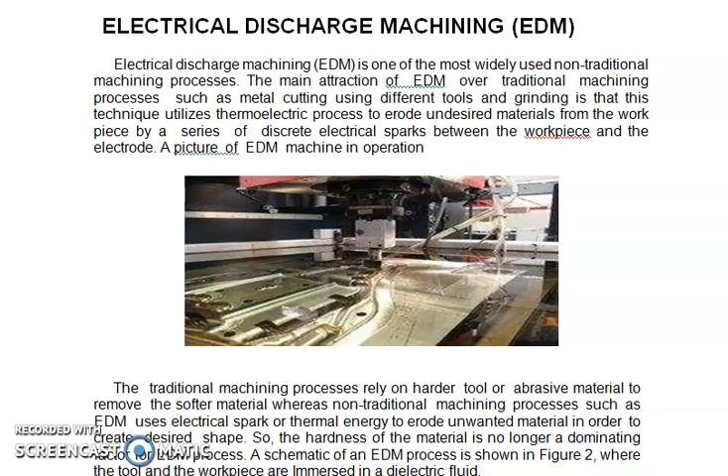The workpiece is connected to the positive terminal and the tool is connected to the negative terminal of DC supply. Hence the workpiece becomes anode and the tool becomes cathode. The workpiece and the electrode are separated by a gap which is called spark gap. This gap is filled by the dielectric which breaks down when the proper voltage is applied. This spark gap is usually maintained from 0.005 mm to 0.05 mm.

When the circuit voltage of 40 volt to 300 volt is applied, then the electrons start flowing from cathode due to the electrostatic field and the gap is ionized. The electric sparks strike on the surface of the workpiece which develop high temperature. It forces the metal to melt and a portion of it may vaporize. The removed portion is driven away by dielectric.

Erosion takes place both at tool as well as workpiece. Less erosion takes place at tool as it is subjected to compressive force. The rate of metal removal depends upon the discharge of current, the duration of pulse and the repetition rate of pulse. In EDM system, the gap is controlled by servo system.

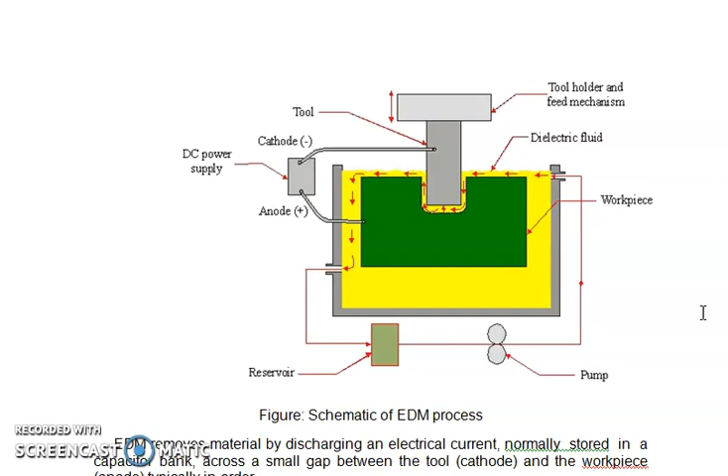Advantages of EDM. The main advantages of EDM are: by this process, material of any hardness can be machined. No burrs are left in the machined surface. One of the main advantages of this process is that thin and fragile or brittle components can be machined without distortion. Complex internal shapes can be machined.

Then limitations or disadvantages are: this process can be employed in electrically conductive materials only. Material removal rate is low and the process overall is slow compared to conventional machining processes. Unwanted erosion and overcutting of material can occur. Rough surface finish at high rates of material removal. Then applications of EDM. It is used for resharpening of cutting tools and machining of cavities for dies.

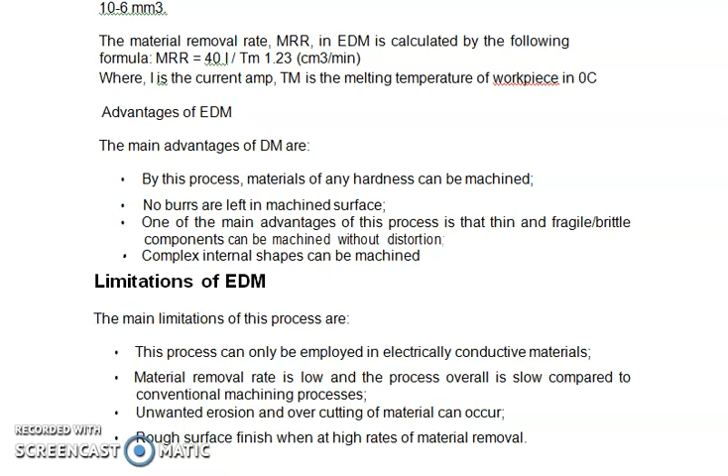The next process is wire cut electrical discharge machining, or WCEDM. EDM primarily exists commercially in the form of die sinking machines and wire process. A slowly moving wire travels along the prescribed path and removes material from the workpiece. Wire EDM uses electrothermal mechanisms to cut electrically conductive material.

The material is removed by a series of discrete discharges between the wire electrode and the workpiece in the presence of dielectric fluid, which creates a path for each discharge as the fluid becomes ionized in the gap. The area where discharge takes place is heated to extremely high temperature so that the surface is melted and removed. The removed particles are flushed away by the flowing dielectric fluids.

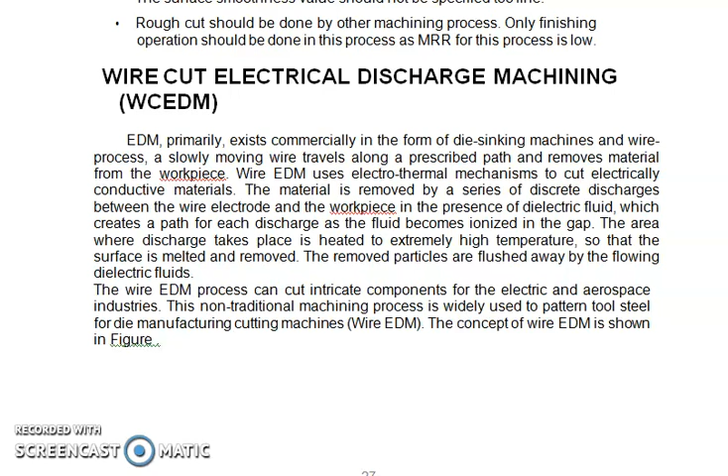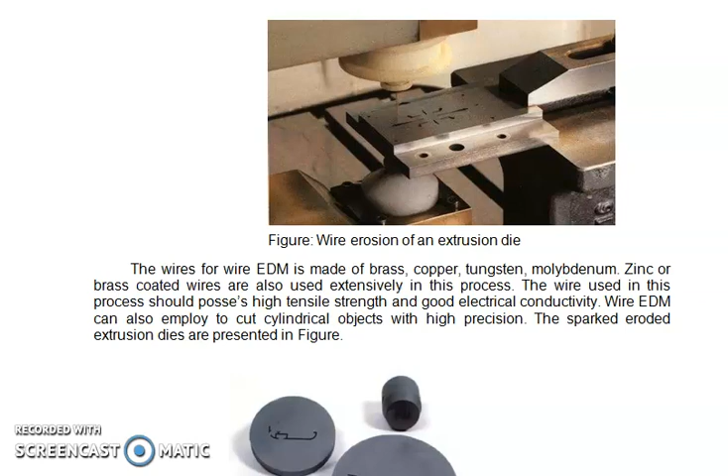Wire EDM can also be employed to cut cylindrical objects with high precision. The spark eroded extrusion dies are presented in this figure here. Spark eroded extrusion dies. This process is usually used in conjunction with CNC and will only work when a part is to be cut completely through.

The melting temperature of the part to be machined is an important parameter for this process rather than strength or hardness. The surface quality and MRR of the machined surface by wire EDM will depend on different machining parameters such as applied fixed current and wire materials.

Different types of laser are available for manufacturing operations which are as follows. Those are CO2 or carbon dioxide. It is a gas laser that emits light in the infrared region. It can provide up to 25 kW in continuous wave mode.

Then the next one is neodymium-doped yttrium aluminum garnet. This laser is a solid state laser which can deliver light through a fiber optic cable. It can provide up to 50 kW power in pulse mode and 1 kilowatt in continuous wave mode.

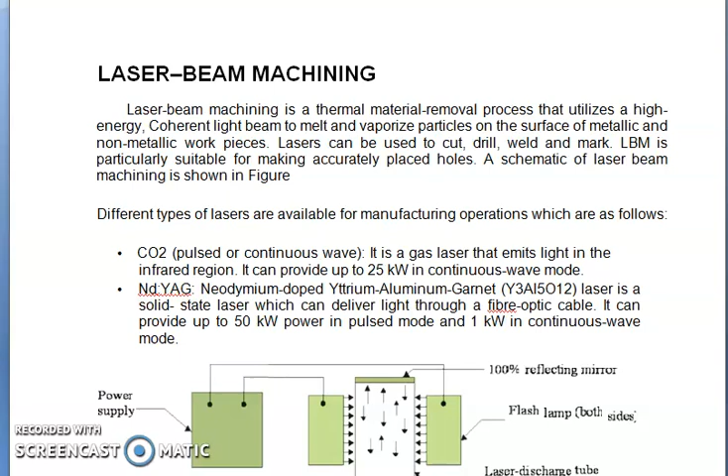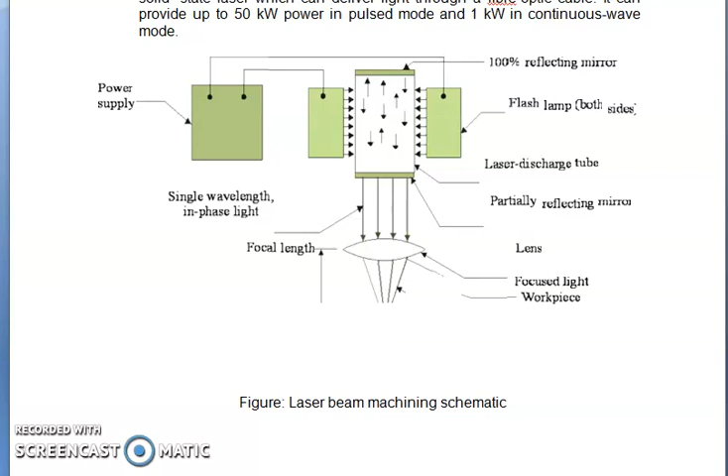This is the setup of a laser beam machining process. Here we can see the power supply, then we can see the flash lamp which is the source of light, then the laser discharge tube, partially reflecting mirror, lens and focused light. Then after using the lens we can focus the light into a single point, then the workpiece.

Applications of LBM. LBM can make very accurate holes as small as 0.005 mm in refractory materials, ceramics, metals and composite materials without warping the workpieces. This process is widely used for drilling. First I will discuss laser beam cutting or drilling.

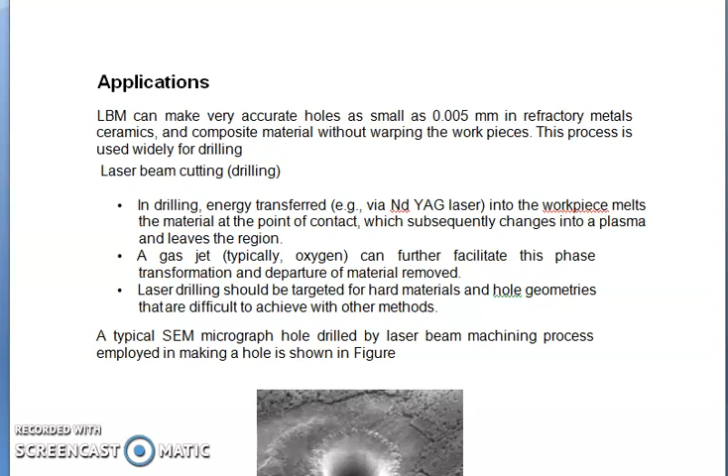In drilling, energy transferred into the workpiece melts the material at the point of contact, and subsequently a gas jet, typically oxygen, can further facilitate this phase transformation and departure of material removed. Laser drilling should be targeted for hard materials and hole geometries that are difficult to achieve with other methods. A typical SEM micrograph of a hole drilled by laser beam machining can be seen in this figure.

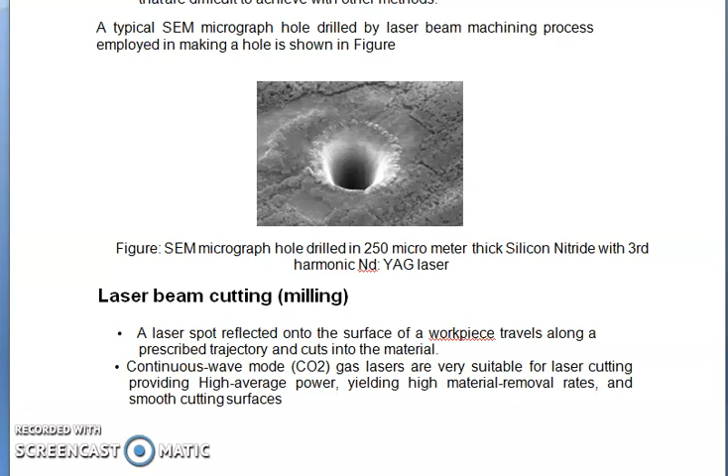Then laser beam cutting, that is milling operation. A laser spot reflected onto the surface of a workpiece travels along the prescribed trajectory and cuts into the material. Continuous wave mode lasers, that is CO2 gas lasers, are very suitable for laser cutting, providing high average power, yielding high material removal rate and smooth cutting surfaces.

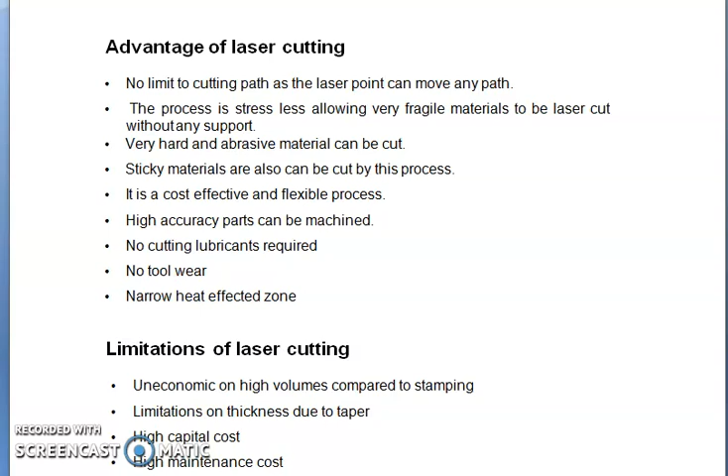Advantages of laser cutting. No limit to cutting path as the laser point can move along any path. The process is stressless, allowing very fragile materials to be cut without support. Very hard and abrasive material can be cut. Sticky materials can also be processed in this method. It is a cost-effective and flexible process. High accuracy parts can be machined. No cutting lubricants are required. No tool wear. Narrow heat affected zone.

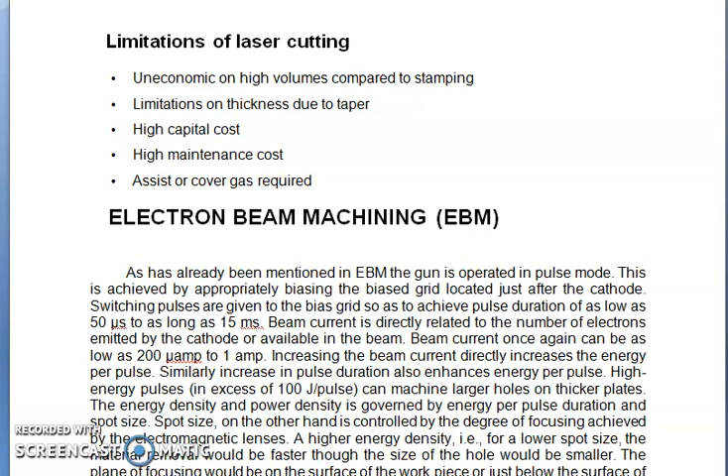The next one is limitations or disadvantages of laser cutting. Uneconomical on high volumes compared to stamping, limitations on thickness due to taper, high capital cost, high maintenance cost, and assist or cover gas required. Then the next method is electron beam machining.